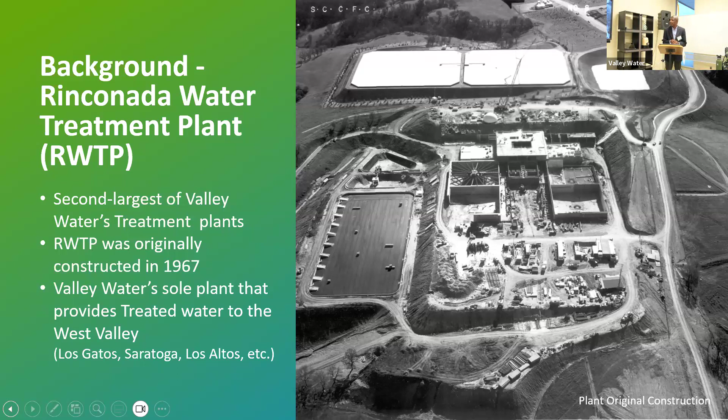So the background: Valley Water started this project somewhere in 2015. That's a picture of how the plant looked like at that time. As already conveyed to you, this is the second largest treatment plant for Valley Water. It was originally built in 1967, and it's the sole plant that provides treated water in the West Valley to the various cities, Los Gatos, Saratoga, Los Altos, and the rest.

The project objectives, covering the whole phase 1 to phase 6, include upgrading the aging equipment. Most of the facilities, from 1967, are almost at what we call the end of the design life, meaning when we designed it, it was meant to last maybe 50 years, and that's passed, so it needs to be replaced. Valley Water is undertaking replacement of their infrastructure to make sure we are supplying water and the residents get water supply.

The project is also being undertaken to comply with updated seismic codes. In California, we undergo a lot of earthquakes and various disasters, so current codes stipulate what we have to comply with.

The other part is to meet current water quality standards. Sam talked about the Division of Drinking Water standards that we adhere to. We also have to improve plant safety and increase water production. Right now we can produce up to 80 million gallons per day, and by the end, when we finish the project, we'll be able to produce 100 million gallons per day. In general, the reliability project is to improve the reliability of water supply to the residents.

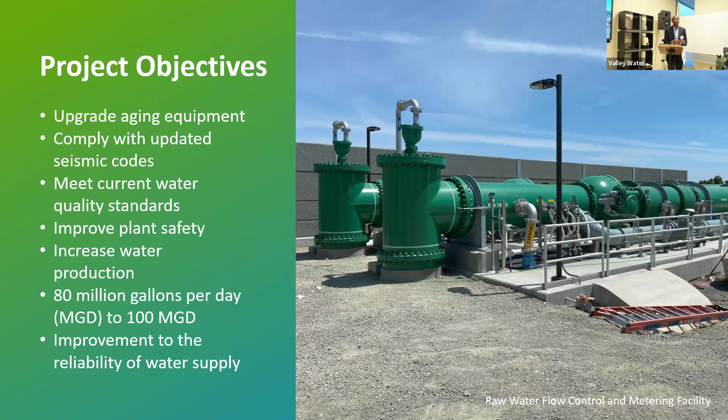So the phases: we started with phase 1. I showed you the picture of the original plant in 2015 when we started. The picture on the left is when we completed phase 1 and 2, and that's how the plant looks now. On the right is phase 3 to 6, an artist's rendition of what we think the plant will look like after we finish that work.

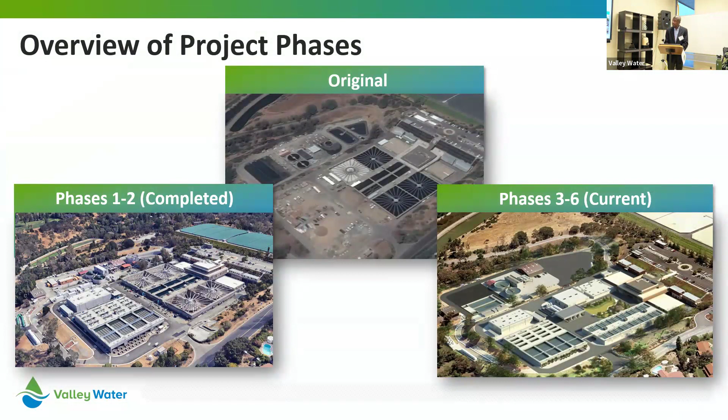So the phase 3 to 6 work is broken into phase 3. We are going to be doing the demolition of the clarifiers, which we've talked about, and then a lot of construction work to make way for phase 4 and 5. That's what you've seen: the surveying, potholing. We do potholing to identify or find some of the pipelines or things that were buried in 1967.

What is potholing? Potholing is when we drill through the ground where we think a pipe will be laid, and then we hit it or find it, and put it on paper. That tells us there's a pipe in that particular position, so we have to take extra care when we're digging down there. Then we'll be doing traffic control.

In phase 4, we'll be building new facilities. Sam talked about the new ozone generation building, liquid oxygen facility, and then we'll be building filters and a chlorine contact basin.

Phase 5 to 6 is where we bring everything together. We do the chemical facilities, demolition of the existing filters and other basins that we've already shown, and then we get into the construction end, which we call demobilization. The contractor takes their equipment away, and then there's peace—you don't hear any noise and things anymore.

As shown by Sam, there are 4 big concrete clarifiers which we're going to be taking out to make space for the new facilities we're bringing on board, because they take up a lot of space. There was a question on how it will be done. Right now, I understand it will be done from east to west. The east is the side close to you, and the west is on the other side. We number them 3 and 4, and then 1 and 2.

So that is where we're going to do a lot of work by the contractor, and we'll be trying as much as possible to reduce the noise and reduce the impact. We're not going to be using explosives; the contractor is going to use other methods for taking down some of the facilities and equipment.

Then we go into phase 4, and in phase 4, we build the new facilities after the clarifiers have been demolished and the area cleaned out. We will be building the liquid oxygen storage, the new ozone building, the new chlorine contact basin, and then the new filters.

And then phase 5 and 6 is where we finish up with the rest of the facilities, and then we make certain improvements as we go along, and also bring the construction to completion.

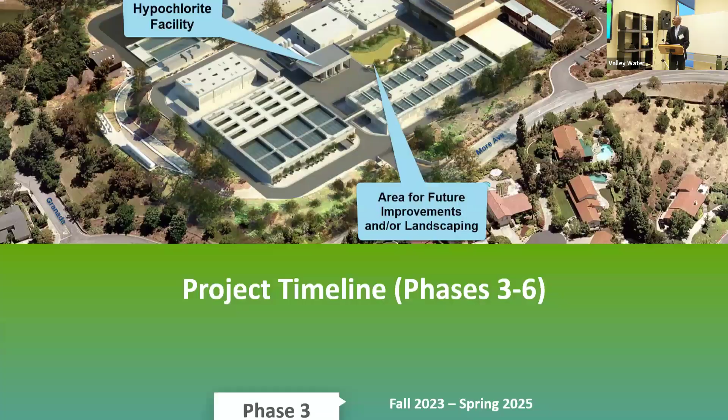So that's the phase 3 to 6 construction work that we are going to be undertaking. This is the timeline of what we have right now.

Phase 3 will begin in March, somewhere in the middle of March, and that's fall 2023 to spring 2025. And phase 4 will be spring 2025 to 2027. And phase 5 to 6 will be 2027 to late 2029, so 2029 is when we will finish the project.

Before I finish, I wanted to highlight that the district has a capital improvement program, which our board approves every year. Every year we take it around to the various cities to tell them about what the Valley Water capital projects involve, and we encourage you to participate in the process.

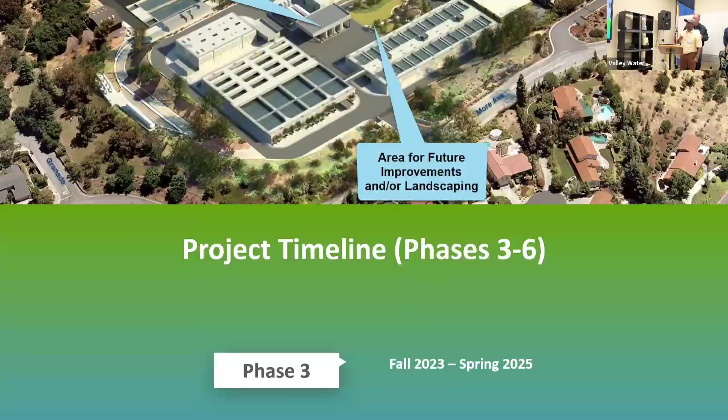Okay, so if you don't mind, let me point out - go back a little bit to the previous pictures. There we go, okay, one more - Phase 3.

Now, this is the current look of the facility. These are the old clarifiers that are going to be removed. Where are we right now? We're here now, right over here. So these are the new floc-sed basins that are already built. These are in service. These clarifiers are empty, no longer in service. That's why we're building it in steps, right?

So now we already have the plant processing water, so there will be no impact at all. Now, when these are demolished, we have this already clarifying the water. Now, the next step for us, to remove these filters, we have to build new filters. Once this is demolished and the next phase, phase 4, we'll build new filters in this area, and then we remove the old filters. So that's why phase 1 and 2 was done in phases, because we want to make sure that before we go and demo the old facilities, we have new facilities to treat the water.

As we mentioned earlier, this is the only facility that we have on the west side of the valley, so we don't have any redundant facility to take this offline and build. So that's why one of the challenges we talked about is building a new facility while we're trying to maintain the operation and supply to the west side. Thank you, that's an excellent question.

Great, second question is from my wife, who couldn't be here tonight. Her question is, since there's so many drugs like fentanyl coming across the border every day, and we hear the amount is enough to kill Americans every few days - these statistics are quite alarming - what does this plant do to make sure that the water we receive is of high quality, there's no fentanyl or other drugs, anything else that a terrorist could put in that could wipe out the west side?

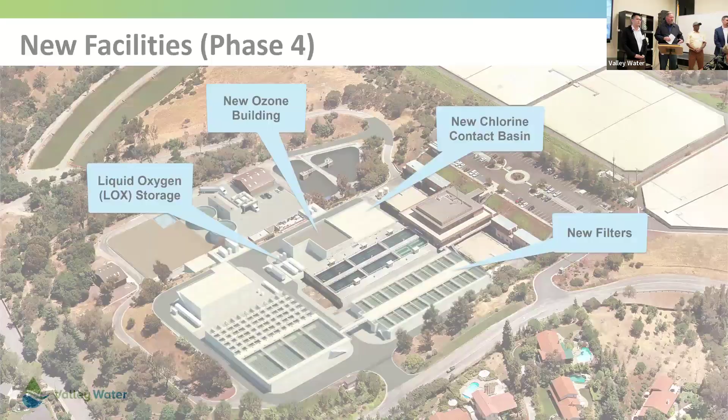We'd be very thankful for that, but I will address it if it's not enough. If this is a serious 5-year program that might end up being another 10, it's a situation for us, and some of us are not getting any younger. The last thing I'd like to say is, if you're going to be using that as a staging area, that is where a lot of the wildlife lives. Do you have a solution for that?

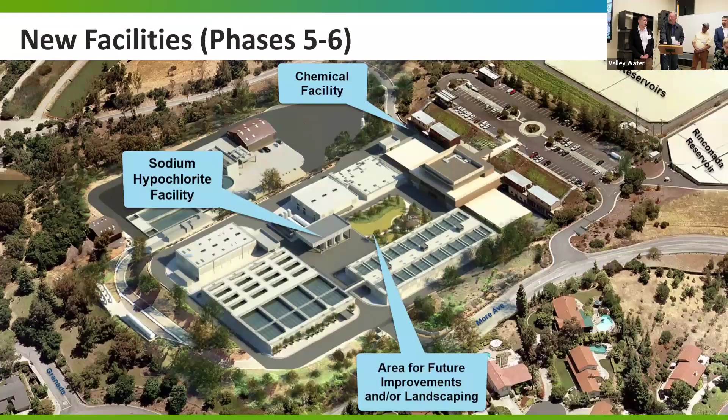Yes, we have a certified biologist on the project who does weekly and monthly biological surveys. If any wildlife is identified, even something as small as a bird's nest, we will be installing exclusion buffer areas around that area to protect them. So even if they burrow in the ground? The biologists have all of those on their radar, yes.

Forgive me for questioning it, but if for the first time you saw the dead foliage and plants that were planted a year ago, my confidence of you having a biologist on payroll is not very strong. My confidence is not there. And so the reason why—that was done under a different project. It's outside of the plant fence line.

That's not the water utility group, that was the watershed group. But now that we know of it, we can communicate that to them and work together. We're all a pretty tight neighborhood, we walk those pathways frequently, we live in the neighborhood.

We're all a little bit alarmed at the 5-year, potentially 10-year program you're phasing in. We all want safe, reliable service, whatever your term was. We're not trying to give you a hard time, but we're living it day to day. You get to drive home and be away from this, we are living with the noise. How are you going to abate the noise without the wind pattern coming towards us?

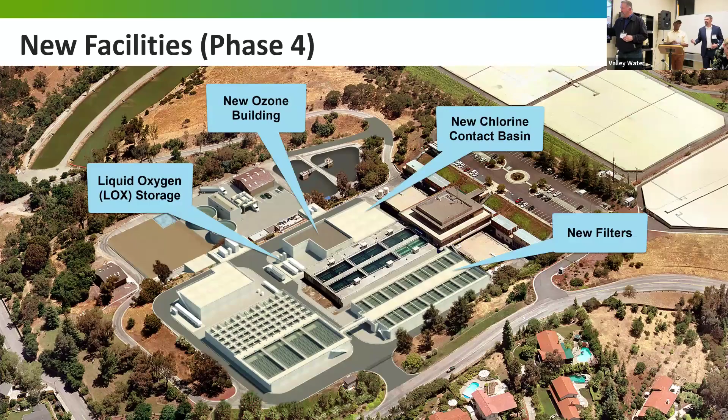So these are the new buildings. This is the new one, if we go back one slide. Okay, no, I get that, so it's kind of a must-have. These will do what these are doing, so these need to be demolished so that the next phase of the project can be built there.

Okay, so then I have two questions. One is, I might be able to look at your video and answer some of them. And the other one is...

We had two certified mail letters come to us to have our house surveyed, and it always kind of makes you a little bit nervous. You don't really want somebody to come in, they're just going to find reasons to, I don't know, it's kind of scary for us. So my husband just flat out says he doesn't want to do it.

But I would really like to find out, what do you actually do during this survey? Yeah, why are you doing it?

They're doing it so that if there's damage in the future, they have evidence of what the condition is now. If there's a difference, it makes the claim very simple, but it also creates a baseline, makes it a bigger... Not looking for the electrical outlet your cousin added or something, none of that.

It's intended to document the existing conditions of the cement or the stucco. If at some point it's changed dramatically and the only difference is this demolition happened across the road, we've got a process: you can file a claim and say this was damaged while that was happening, here's the baseline picture and here's what it looks like now, it's a big crack. Then you can file a claim with the district and they'll resolve it and evaluate it.

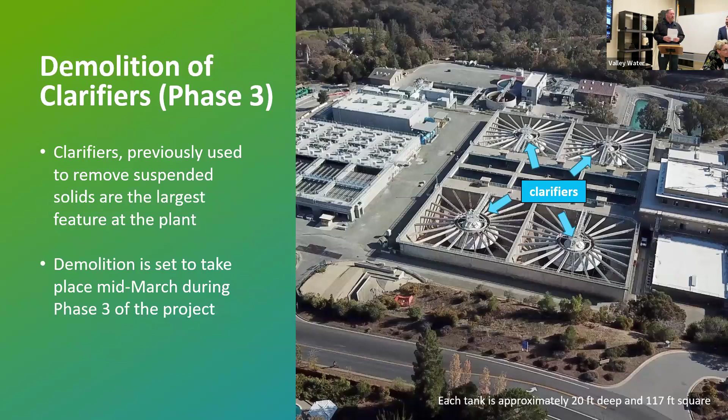Maybe someone's not here tonight, and again we'll post this on our YouTube channel. Yes, starting this March 11th. Contractor, put those in—yeah, it's slated to start mid-March, right? Yeah, mid-March, yeah.